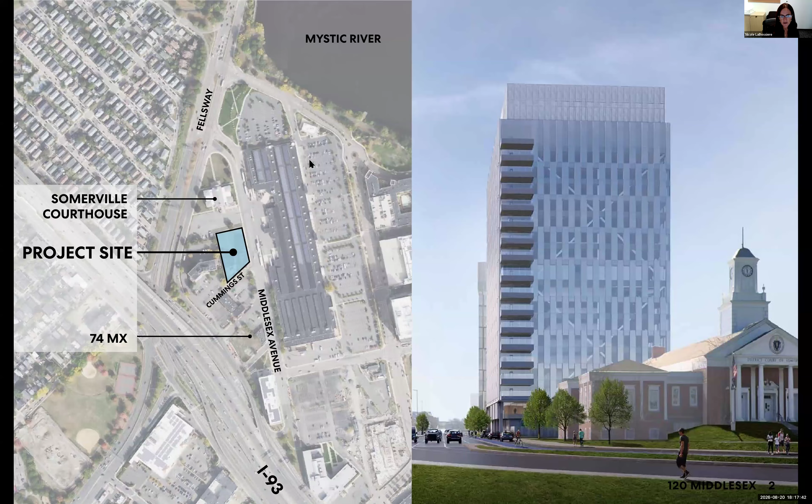While our permitting journey's been challenging and costly, the past 5 years have resulted in an even better building in sight, thanks to city staff involvement and their vision along the way. We've collaborated most closely with planning, mobility, and urban forestry to accommodate requests such as relocating parking off of Cummings Street, pulling the corner of our building back, adding a 12-foot wide multi-use path, and revising our Cummings Street streetscape for the future of a one-way road. We appreciate all the thoughtful ideas and guidance to get us here tonight.

Next page. Tonight's presentation was informed by staff comments in that process, so we're hopeful that you can keep that in mind while you listen and share our goal of a fully entitled project. While things may appear slow on the surface, having an approved project to offer will allow us to compete in what is truly a competitive environment.

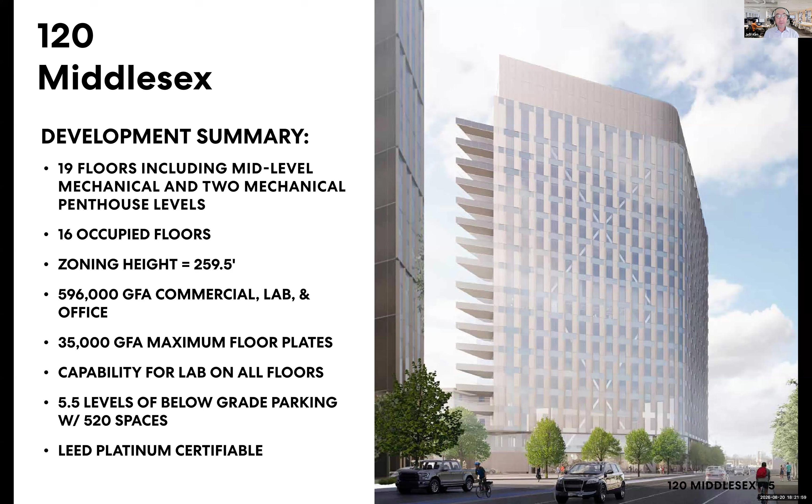This is a view of the project looking south with the courthouse in the foreground on the right. As you enter the district from the Fellsway onto Middlesex Avenue, the project will establish a new gateway to this growing new life science cluster in the larger mixed-use district.

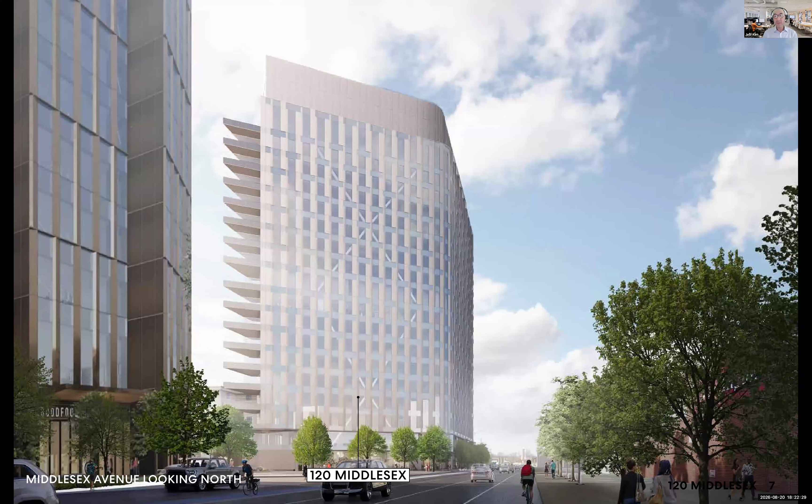Now you're looking north along Middlesex Avenue to help orient you. 74 Middlesex is on the left, which has recently been completed. Together, these two projects will significantly improve the pedestrian experience along the street. There are a few features I would like to point out in this view.

The proposed facade combines glass and metal panels in a layered pattern. That composition extends over the first mechanical penthouse level, helping to reduce the perceived bulk of the two-story mechanical penthouse that we currently have. The facade also sweeps around the corner at Cummings in one continuous gesture, responding to the oblique geometry of the intersection. And finally, the balconies at both north and south ends are a unique feature of the building and will provide a desirable outdoor amenity for the tenants.

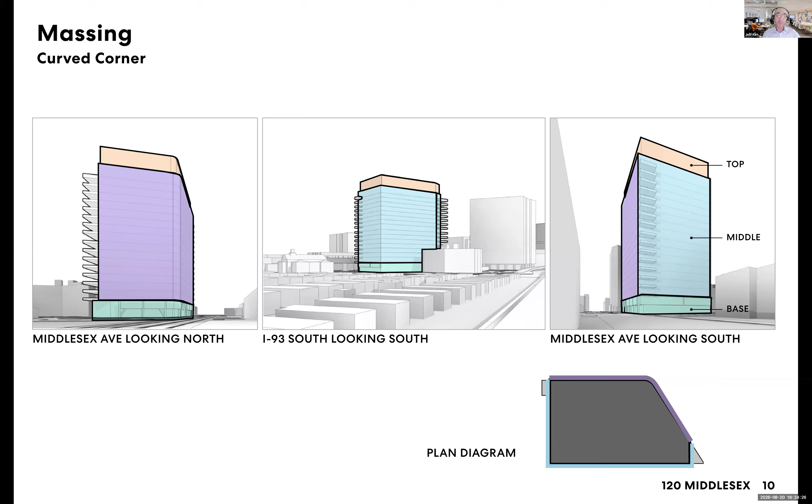This slide takes a closer look at the composition of the two facade types. Type 1 is an overlapping composition of glass and metal panels, articulated with two-story vertical fins, and Type 3 is an all glass facade using overlapping clear and spandrel glass, also articulated with two-story vertical fins.

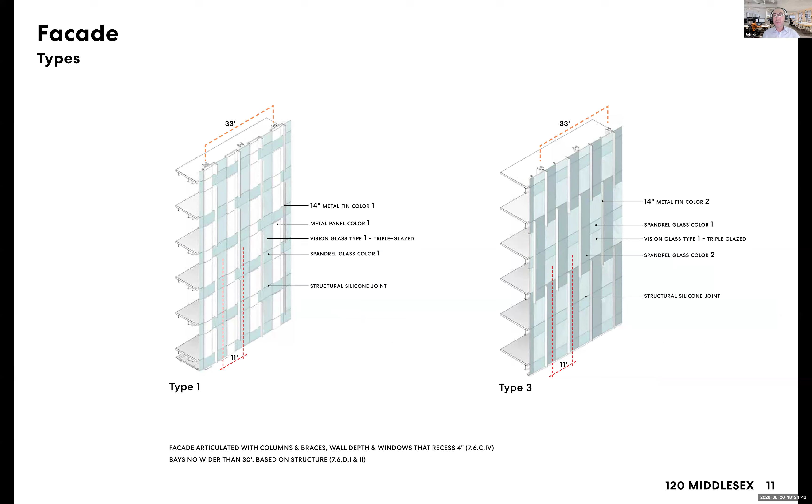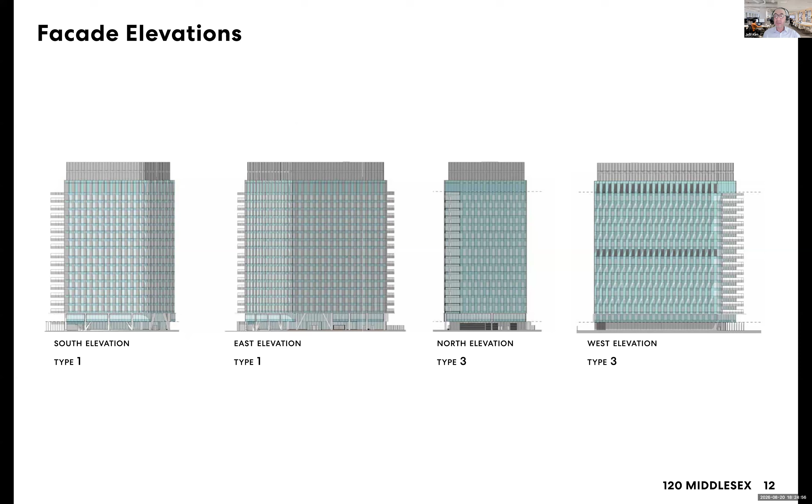And here are the building elevations showing both Type 1 and Type 3. Type 1 on the south and east facades, and Type 3 on the north and west facades.

And this time, Sean will. Thanks, Jeff. Yeah, Sean Sanger with Copley Wolf Design Group. We're excited to be here. Thank you for holding us.

Kind of just starting out with the diagram here, this is one of the early concept sketches, and I wanted to bring this back just so everybody's up to speed. As Nicole mentioned early on in the process, we had a lot of really productive conversations with city staff, and certainly one of the key pieces that came out of that was the connectivity and the pedestrian priority, as you're seeing through that hatched zone that would be along our building, which is in the upper right corner of this diagram.

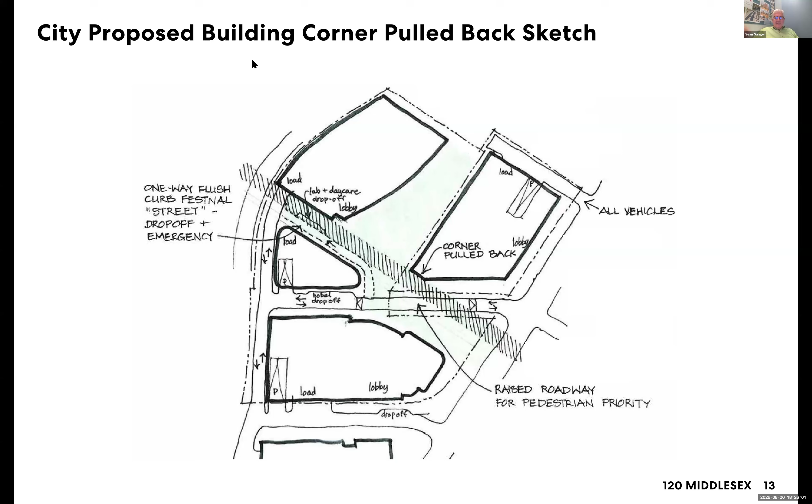And what we did as part of this conversation, once again trying to get those desire lines, visual connections for circulation, primarily for bikes and peds, is we pulled back the corner of the building. It originally projected out much further, and you definitely had a chance to see that as part of the elevations that Jeff just discussed. But once again, just looking at this at the macro level, and then what we'll do is zoom in on the next slide and talk a little bit more about our site and the context around it.

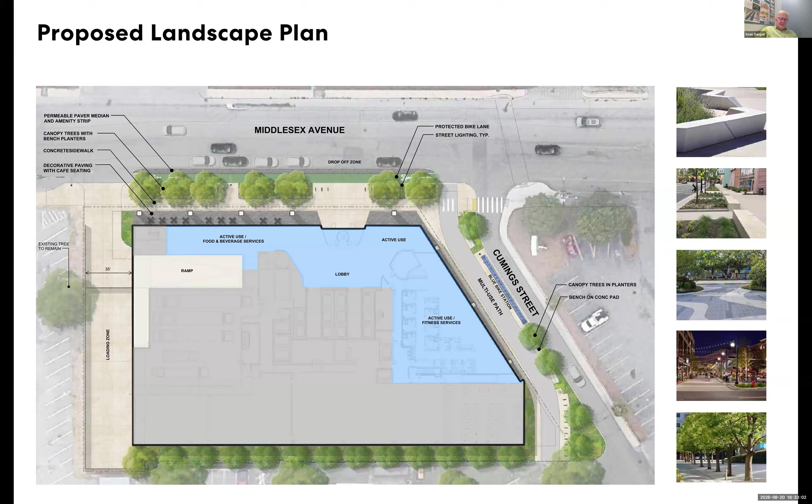We've got our planting, and we'll continue with structural soil below the sidewalks. We want these street trees to really thrive and grow, not merely survive, looking at large canopy scale both for the sidewalk and urban heat island minimization. The sidewalk runs through the center with benches and seating along the street side, and you can see the arcade underneath on the right.

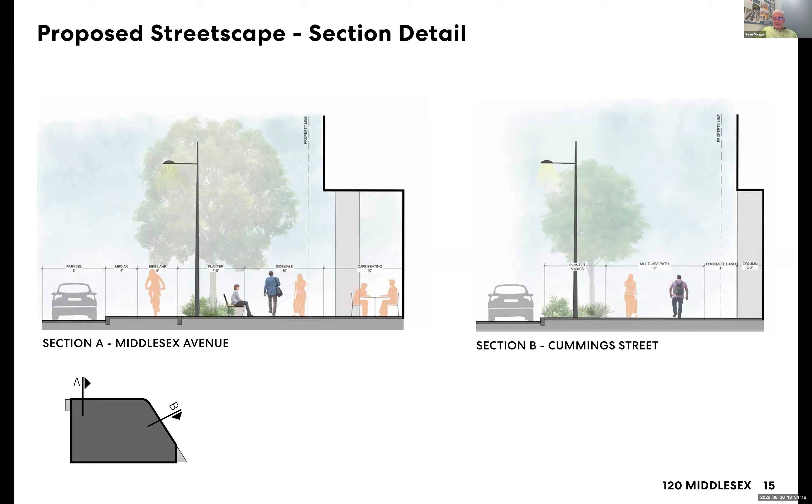This came out of a good conversation with mobility as well as public open space and urban forestry, introducing larger canopy trees along Cummings to help with heat island mitigation. We have planting below that and seating along here, plus the 12-foot multi-use path as Nicole mentioned. There's still a very comfortable buffer between that path and the edge of the building.

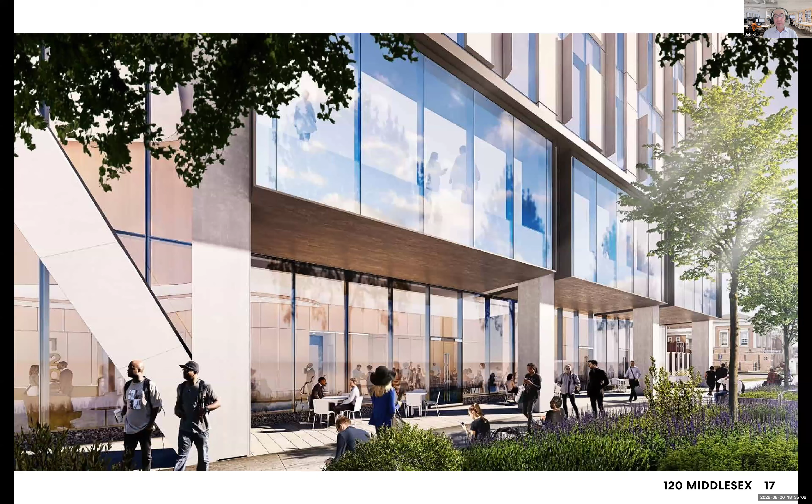Zooming into the sidewalk level, the main entry is to the left, with bench planters and canopy trees to the right. This view gives a good sense of the two-story base and the one-story arcade, framed by the building columns.

Here's a view from Cummings Street, showing the squared-off intersection of the property and the crosswalk, along with planters and bike racks. You can again see the two-story base as well as the clear view through the corner of the property toward the pedestrian path beyond.

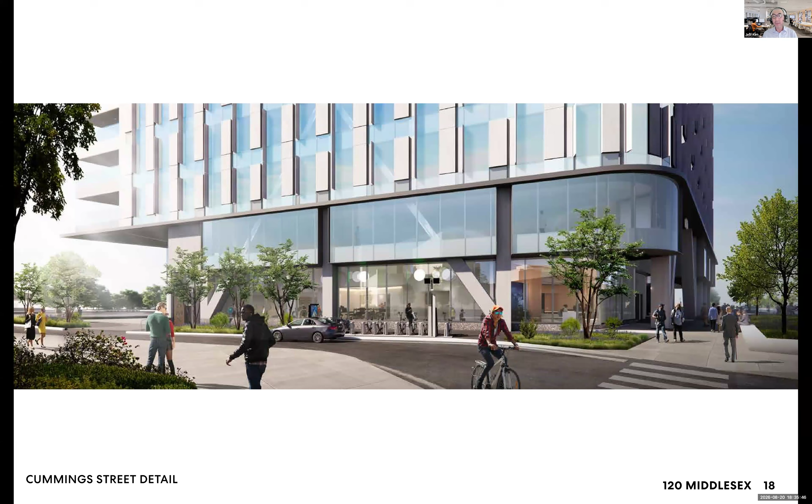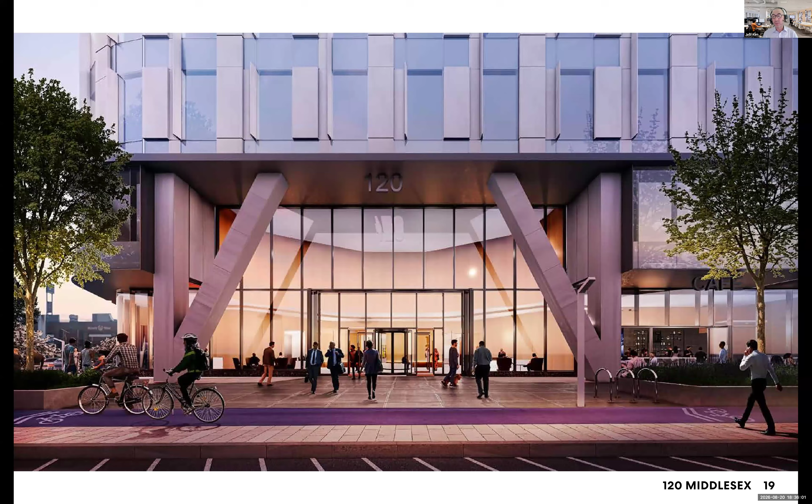This is a view of the main entry. It's a grand and transparent entry, accentuated by the structural bracing, creating a clear and strong gesture along Middlesex Avenue.

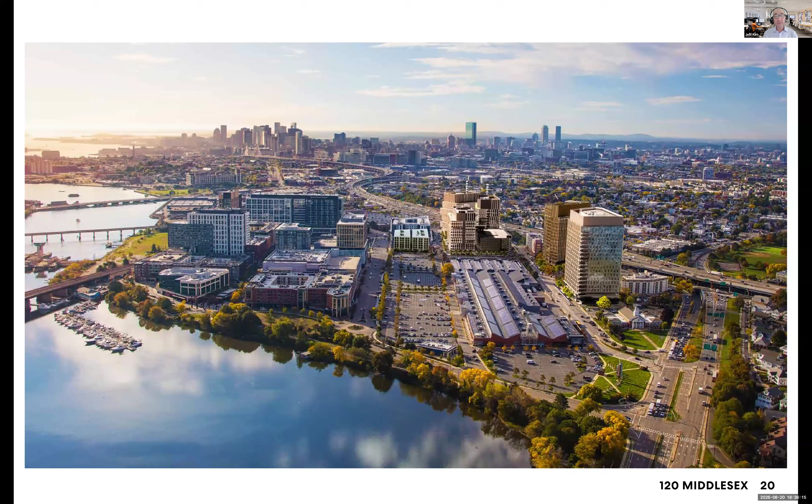And finally, here's an aerial view. It gives a sense of the future Assembly Square district and how the project fits into a larger context. Thank you.

Thank you very much for the presentation. Does anybody, outside of my question earlier, on the planning board have any questions they'd like to ask the applicant before I open this up to public testimony?

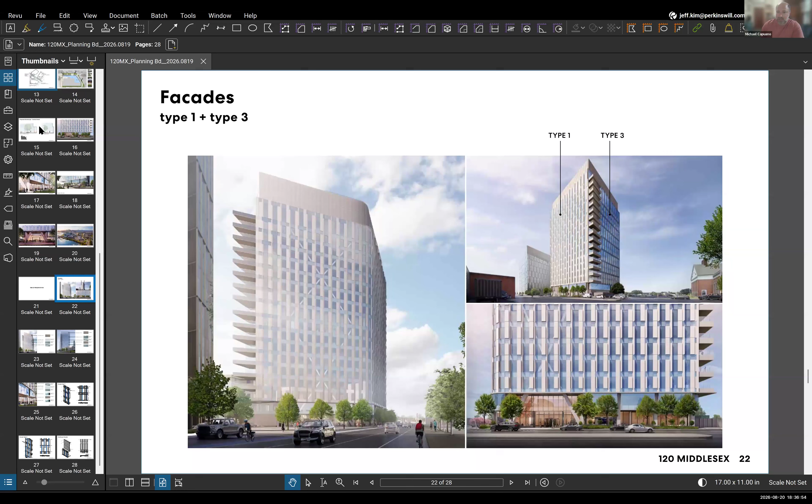Okay, so what I'd like to do now is thank the applicant for the presentation and open this up to public testimony for anybody that wants to speak in support of the application. If you'd like to do that, please hit the raised hand button and I'll call on you in the order in which I see you.

Going once, going twice. Seeing none, I will close that portion of the public hearing and open it up to anybody that wants to speak in opposition to the application or otherwise express concern. Please raise your hand. Going once, going twice. Seeing none, I will close that portion of the public hearing and bring it back to the planning board for discussion and questions for the applicant, their team, or our planning staff.

Yeah, Amelia. Thank you, Mr. Chair. I have other questions which I'm happy to field after my colleagues have raised theirs, but administratively, I'm having a hard time finding the LEED questionnaire. In the application, it's referenced a number of times in the narrative as section 9, but I don't think we have a copy of section 9 as far as I can tell. That might be a staff issue or an applicant issue, but I'd love the opportunity to review that before our next conversation with you if possible.

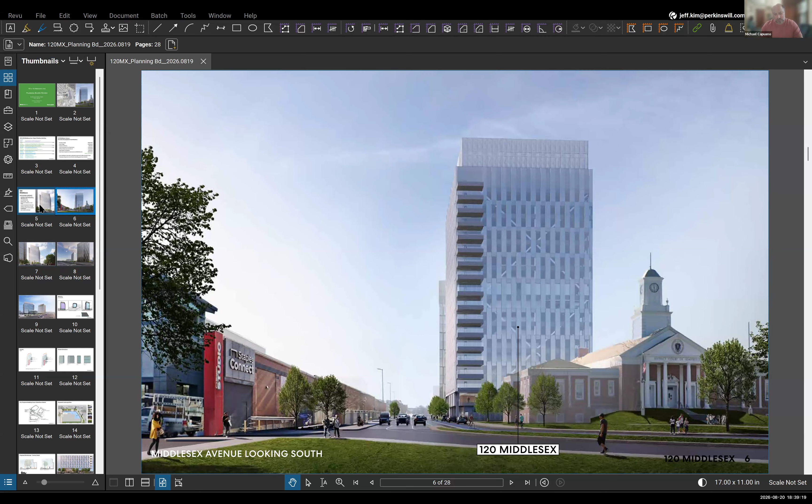Alvaro, do we have that? Let me double check. I'll see in the materials, but if not, it can be sent to the case planner and we will make sure to send it to the board prior to the next hearing. Thanks so much.

You want to keep going, Amelia, or do you want to come back for round 2? Happy to let others know. Okay, who's next? Yeah, Lynn.

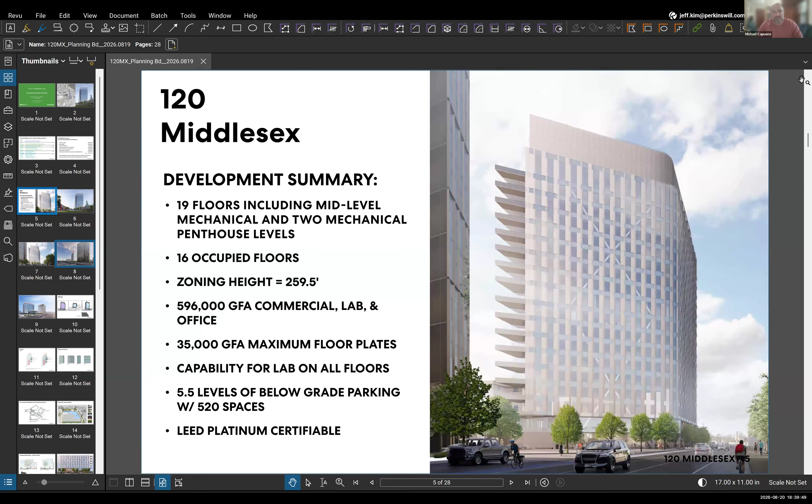Thanks, Michael. I want to circle back around to the issue that you raised around building lab space. So the Boston Globe, as you know, has written a number of articles over the last 12 months that the Boston area, not just the city but the area, has about 30 to 35% empty lab space. That's quite a lot of capacity. Now, I know in the development world, a project like this is probably going to take anywhere from 3 to 7 years to finish, right? Because you're just at the initial stage. And Wayne Gretzky, of course, says you need to shoot the puck to where it's going, not where it is now. So I understand all these dynamics, but I'm still concerned that we may have too much lab space.

And so I know you answered Michael's question like we can convert it to office, but can you talk a little bit more about what your market research is saying on this, number one, and number two, how quickly could you pivot? Because the last thing I want to see happen is that we've got this building sitting vacant, and then the city needs to make a deal and provide all sorts of tax incentives, et cetera, to get a tenant in there, which is just what happened with a building right next to it. So I'd like to understand a little bit more around your market research on this, on a 19-story lab building in an area that's got 30% capacity.

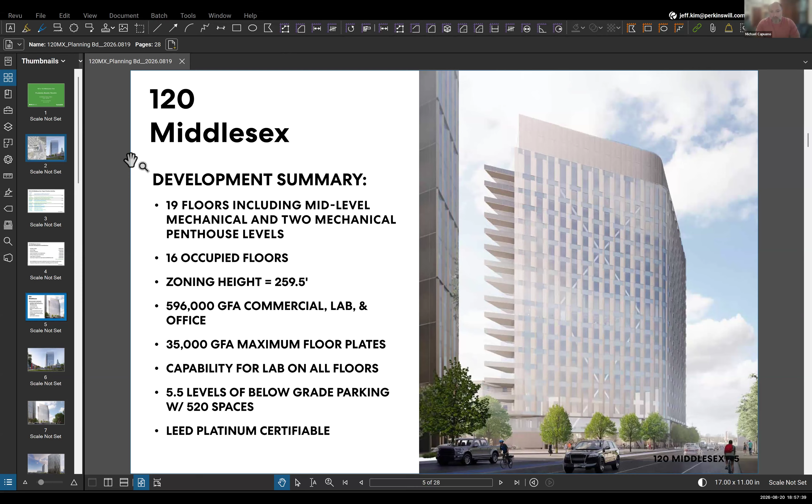So I think where we're at is I think generally we're supportive of this project. I think we just need to ruminate a little bit on whether this is the best way to move forward on this site. I appreciate some of the responses you were giving about the opportunity to move into non-lab if that's where you're going to be, because I hate to be tied down onto something that's not going to be tenanted. It sounds to me, and I need to review this meeting before next, that's not outside the scope of feasibility and reality if that's where we're at.

So what I want to do is have the board think on this for a couple of weeks and leave the written comment open, and hopefully have you guys join us in September and see where we're at as a board. Unless I'm missing somebody's questions or comments right now.

Oh, I see Amelia. Mr. Chair, I just wanted to acknowledge Lynn had mentioned earlier she might have some additional questions. I don't know if she's ready to voice them this evening or not. No, I'm still pondering. Okay, well you'll have another couple weeks for the pondering.

Mr. Chair, can I ask just one question for future? And all those questions are thoughtful.

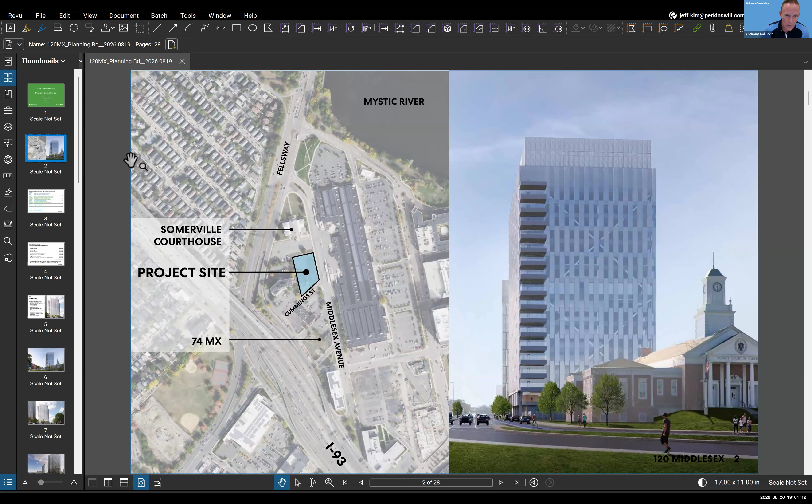And if those companies decide to walk away, you end up with disparate ownership back to sort of one-time developer folks who I don't think will invest the kind of money that folks like Divco have invested. The good news is the big names are still hanging in there at Assembly, and we think Divco's one of them. So I wanted to say that because we were hoping to have staff give a resounding representation of how thorough and responsive Divco was over the last really 4 or 5 years, and that didn't happen. But I know you've read them, I know you all know that, but it's important.

I appreciate that. Where I'm hoping to go in the next couple of weeks is I look at this positively. It's been, as you've reiterated, a very long process. I think another 2 weeks, particularly so Amelia can have some of her questions about the LEED document reviewed, that hasn't reached where it needs to reach, I think is going to put us in a much better place to hopefully move forward in a positive way with this application.

As one member, I'm pretty pleased with the responses you've given. I think we need some rumination over the next couple of weeks, but I would like to be hopefully optimistic based on all the work you and the team have done to get us to this place, and kind of been responsive to the inquiries of the board and of staff. But that's kind of where I think the board is at this point. I very much look forward to seeing you all in a couple of weeks and seeing where we go. Thank you very much.

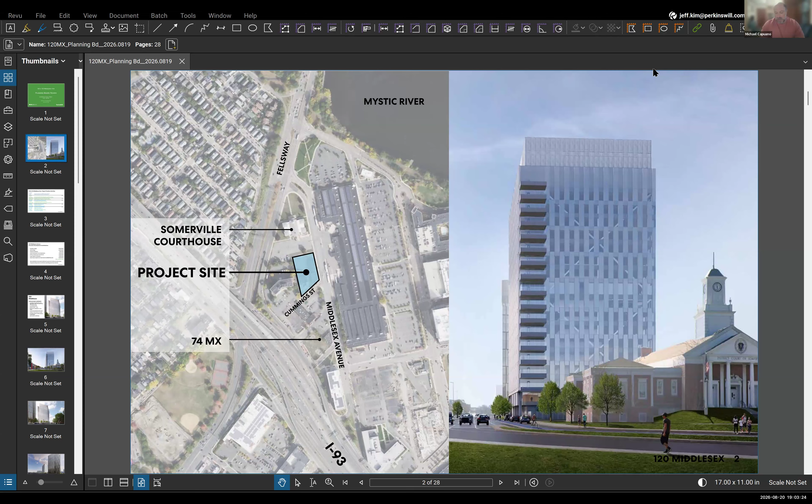Thank you. We look forward to it too. So with that in mind, I'm going to leave the written comment open to planning board at somervillema.gov until 9 a.m. on Friday the 28th, and continue this agenda item to September 3rd.

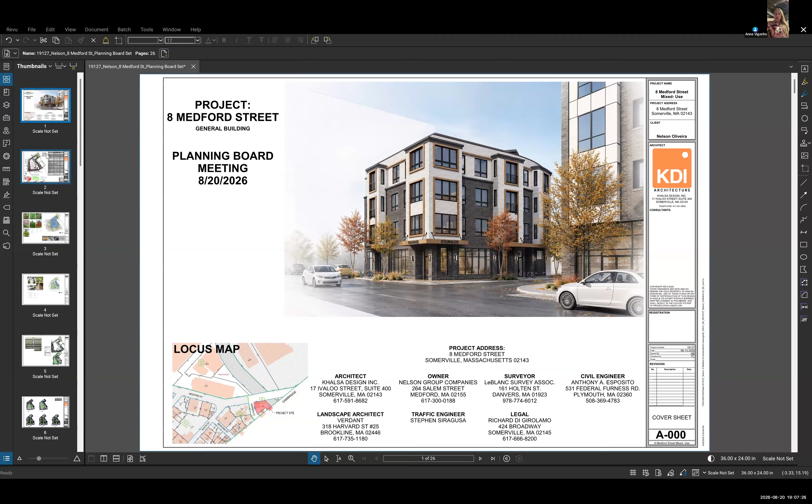All right, so I will begin. We're here this evening to discuss 8 Medford Street. Medford Properties LLC is the applicant. It's in an MR4 zoning district. We're proposing a 4-story general building. It'll be mixed use, 18 residential units.

Those will be a mixture of 1 and 2 bedrooms. The first level will have commercial space. It's on a pedestrian street, so any potential tenants will have to comply with the requirements of a pedestrian street. At this time, the developer doesn't have any clear indication who a tenant would be for that site. One of the more important things here is there's no parking on this site. As I stated, there'll be 18 residential units, and 3.6 of those will be for affordable use as well.

Mobility is supportive of our request to not have parking on the site, and they're supportive of our proposal to have a loading zone in the front of the building, because if I lived at that building, Amazon would be there every single day. So in the world of delivery trucks and moving trucks, people moving in and out, the loading zone will be extremely helpful and ease the neighborhood's concerns.

We did have several neighborhood meetings. Our first one was back in October of 2021. All of our neighborhood meetings were hosted by Ward 2 City Councilor JT Scott. At the first meeting, traffic was a question. Our second meeting, on June 27th of 2022, we actually discussed the traffic study. That's why Steve Siragusa is here tonight, because there could be some questions on that.

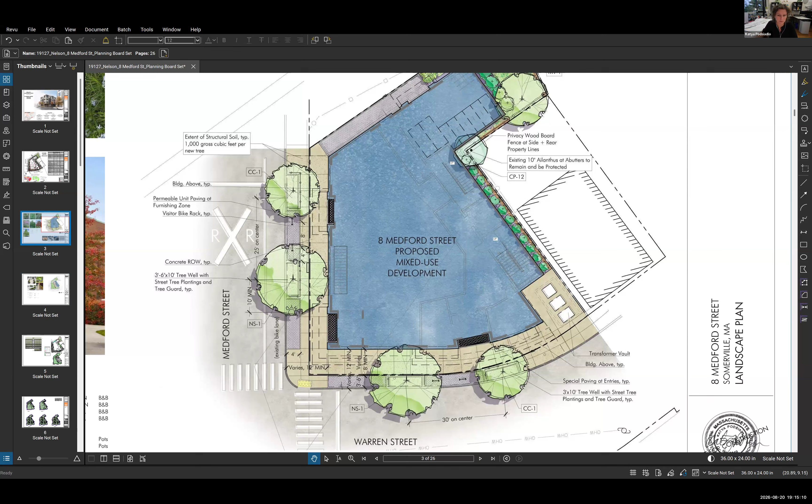This design incorporates all of the city's streetscape design elements and dimensions that are required, including structural soil around all the trees underneath the pavements, tree guard fencing like the little knee rails around the trees, open area wells with the correct open square footage. A new concrete paved pedestrian sidewalk will be built, wider and safer, set back from the curb line behind those trees, a minimum of 10 feet wide for both streetscapes.

Currently, there are 2 curb cuts that come into this site, one from Warren and one from Medford. With the reconstruction of the sidewalks, these curb cuts will be closed and eliminated, making it much safer for pedestrians.

Along the rear and the side, in the green spaces, we've incorporated native, shade-tolerant, and climate-resilient plantings to help enhance biodiversity. And at the very rear, in the slightly enlarged green space, there's a rain garden, so we're proposing wet-tolerant style plantings, which will also help mitigate stormwater.

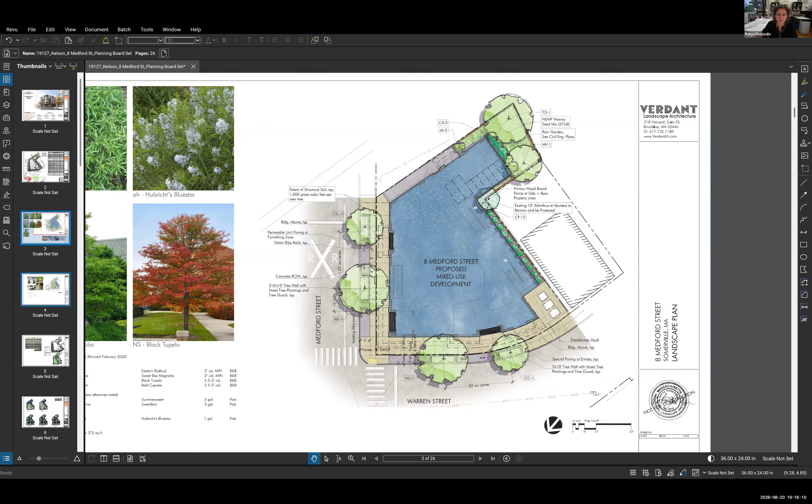The imagery, if you zoom back out - you can see some of the materials and style we're proposing: fencing, bike racks, unit paving, and some of the plant species which are native. If you could go to the next slide, please.

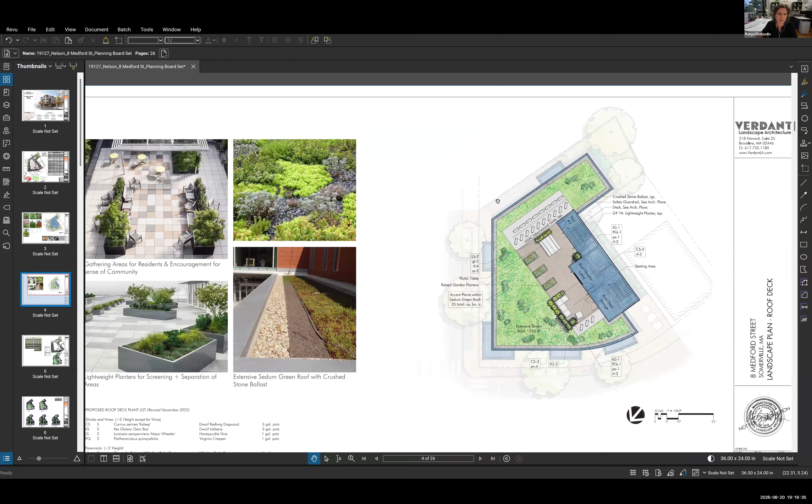So here we're hopping up to the roof level. The blue rectangle is the elevator head house and stairs head house. We've located the patio deck area on the north side of that head house, which affords a little bit of shade from the structure to its south, so a little bit of shade will be cast onto the deck area.

Surrounding the deck is a minimum 6-inch depth extensive vegetated green roof. We've also included some lightweight planters to help divide up the deck into several zones so that several people can come out at the same time and sit separately if they want.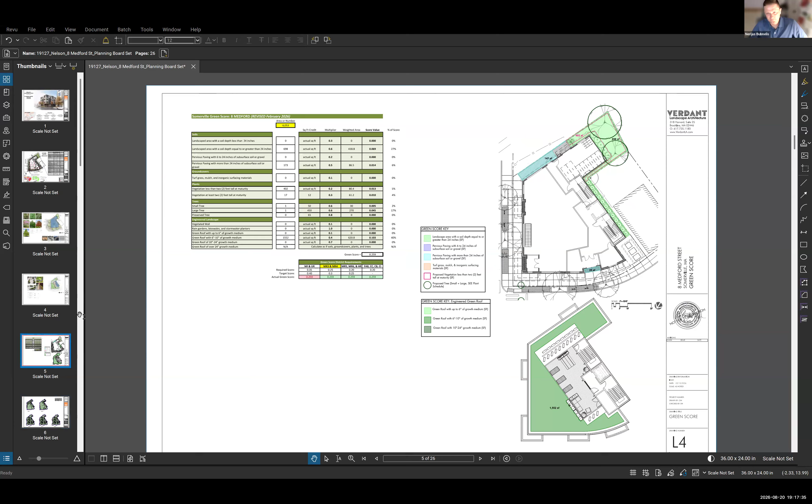Yeah, thank you. So continuing forward, just quickly running through the area plans. The gross area of the building shown here, which includes the basement, is approximately 20,500 square feet.

Moving to the unit areas as well as commercial areas and square footages. As previously mentioned, we have 3 types of units: studios, 1-beds, and 2-beds. We have 6 studios, 9 1-bedroom, and 3 2-bedroom units. The 2-bedroom is approximately 750 square feet, the 1-bedroom is between 590 and 650 square feet, and studios are 370 to 380 square feet.

We have 3 affordable units that are marked in red on those plans. On the top left corner, shown in gray, there's a residential program with mechanical for the building, storage for units, and circulation areas including elevator and stairs, and then we have commercial area and storage area. On the first floor, we have commercial space on the corner of the two streets, and then the rest, on the right side of Warren Street towards the back alongside the setback line, we have circulation on the floors above.

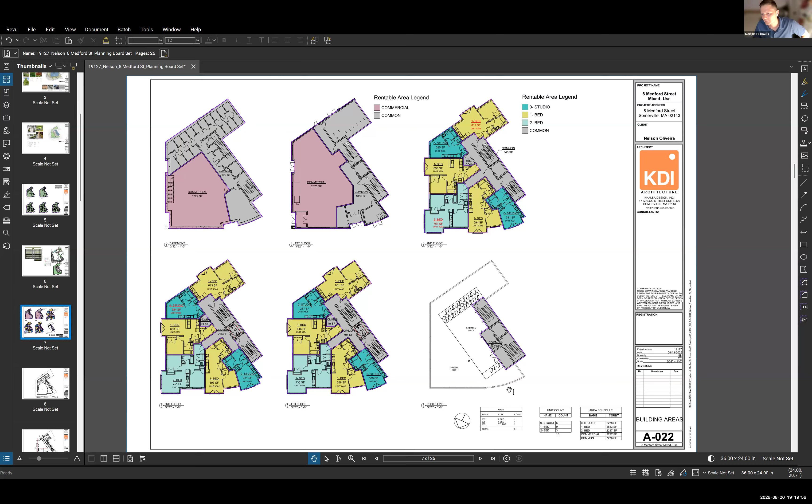The floors second to fourth are stacked, so the unit layout is pretty much the same, with color indicating different types of units. The roof deck itself, as a tenant amenity space, is around 700 to 750 square feet, and then there's some mechanical equipment on the roof level. I think I've covered most of the area plans, but if needed we can zoom in on the floor plans during the discussion section.

I'm going to jump right into the renderings and materiality - we were able to infuse a bit of life into the renderings from those we submitted late last week. In terms of materiality, we proposed full masonry brick in a mix of grays, and then lap siding, with some accent cornices and accent details in a fiber cement bronze color.

In terms of massing, we propose the first 3 stories to have heavier material and full masonry, with the upper floor in lighter material and lap siding, then slicing the rest of the facades with an overhanging base of the lighter material with bronze accents. We've grounded the base with masonry pilasters, if you will, just for architectural look.

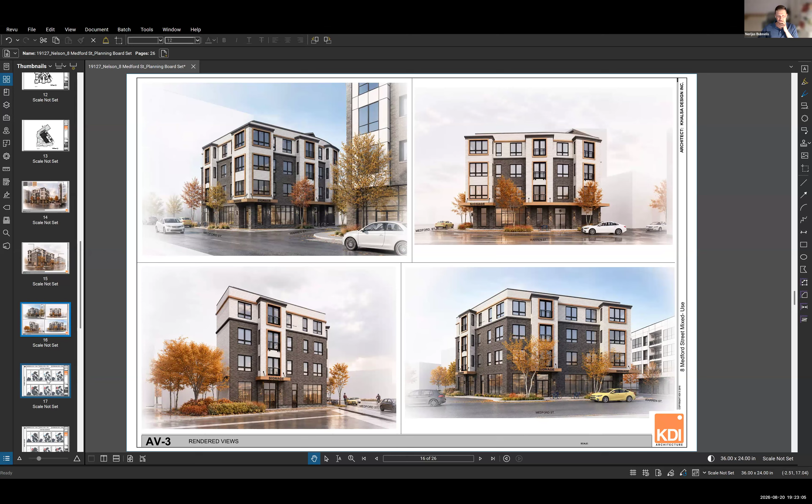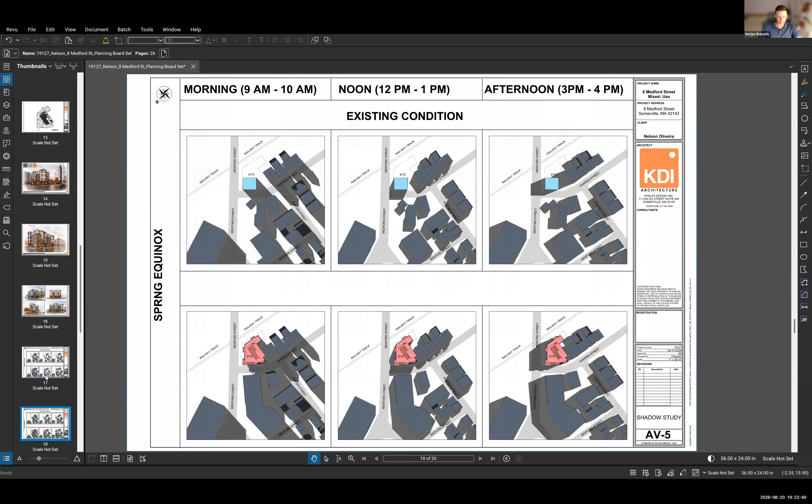On top we show the existing condition, and on the bottom the proposed condition, for each summer solstice and basically each time of day. We see most of the shadows in the summer falling towards Warren Street, and then in spring obviously getting longer and longer shadows, until in winter most of the shadows fall almost on the Medford Street side.

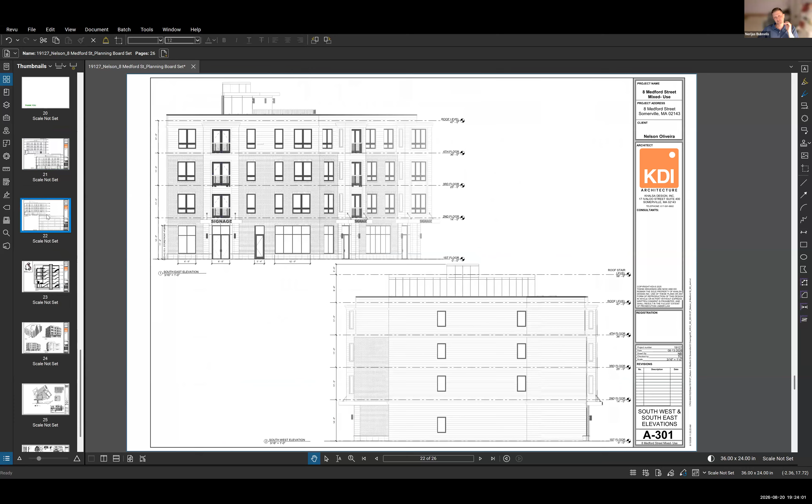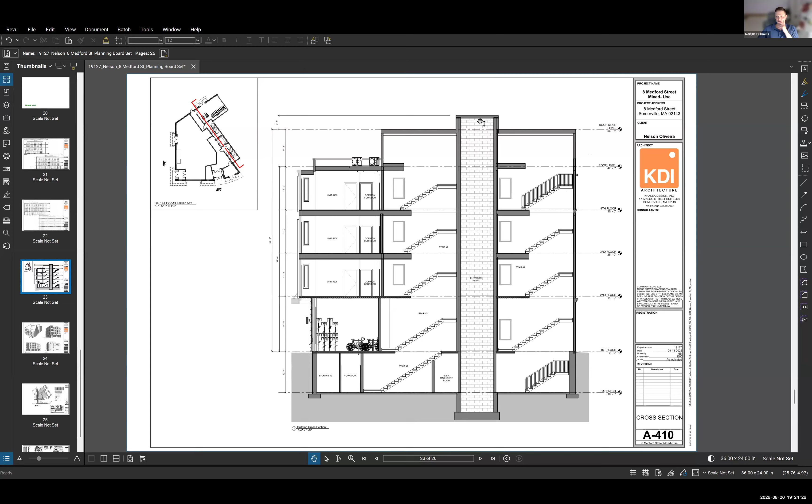And then I have elevations that I believe, if needed, we can touch base on during the comment period. Building section, cut through the stairs just to show the height of the building. The height according to zoning was 47 feet, and then height with the stair head houses as well as elevator head house. That probably concludes my presentation for the architectural portion.

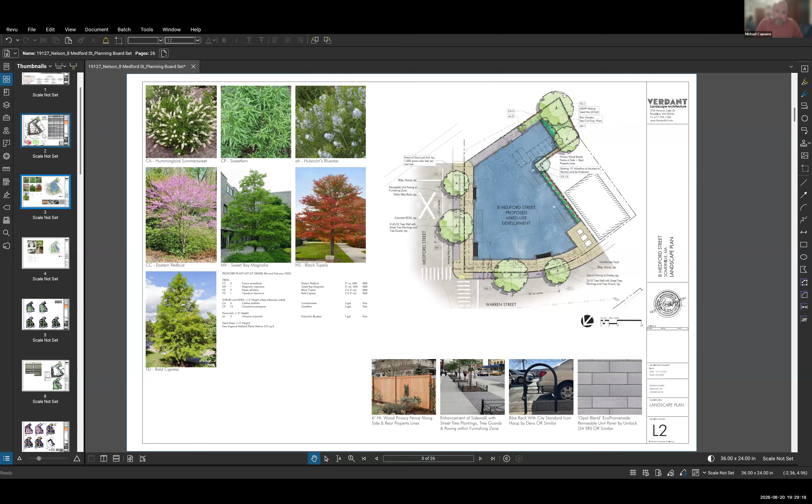Chairman Capuano, Steve Saragusa, our traffic engineer, did a very thorough study of this, and we looked into what the gentleman said and want to answer your question. I don't believe we're in a transit walk shed.

But are we still able to condition the fact that people wouldn't be able to get residential stickers? I think you might be, but I see Kit, who's got her hand raised, so hopefully she might be able to weigh in.

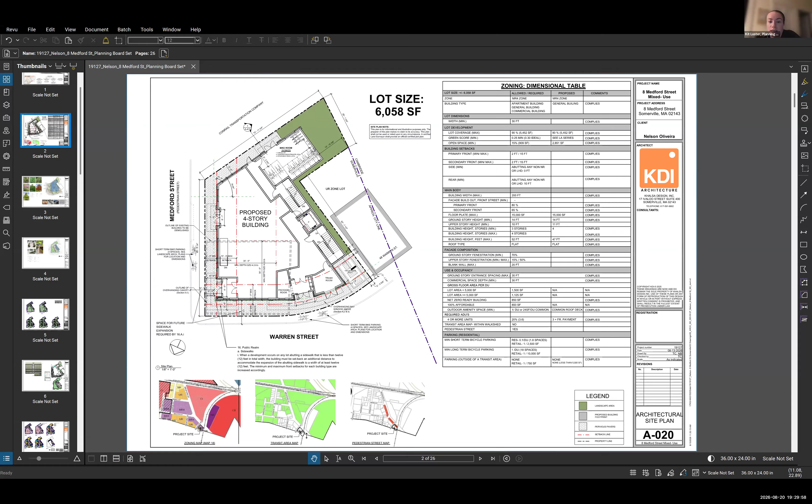Hi, this is Kit. The last time I spoke to Mobility about these very conditions, the residents of this building would be eligible for residential parking permits as they're outside the transit area, and the traffic commission regulation would not be applicable to this development. They are not in the transit walk shed.

How many, so I guess talking about that, while we're on Warren Street which splits the city line, how much availability is there for on-street parking for people who would be eligible for stickers on this residential street versus not?

Maybe Mr. Sturgis has that data. Steve, are you able to give that information? Good evening, my name is Steven Saragusa, the traffic engineer.

I authored the transportation access plan submitted for this site. This Cambridge line is just around the bend, maybe even around the bend of Warren Street, right on the backside, that city line. Currently, with signage, there's maybe space for 3 parking spaces there, about 40 to 60 feet worth of space. Along the surrounding streets, there's a lot going on with Medford Street construction, but along Warren Street, there's really not much opportunity for on-street parking.

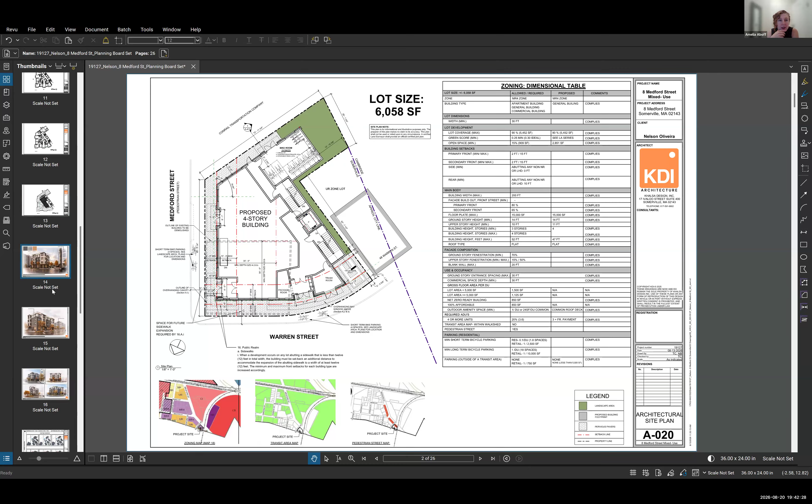I'm sorry, Mr. Chair, I just wanted to follow up on the design point before we close out. It looked like there might have been one facade of the building that did not match the others going around, like perhaps it was all lap siding without the masonry detail. I didn't get a good look at it, and I don't think I have this plan set uploaded yet, so I'm not sure if you can bring that back up, but I'd love to ask if we could revisit that either today or on the 17th. Often the planning board has an interest in ensuring buildings feel complete around all three dimensions if there's not something immediately abutting there.

I'm having trouble with the exact context mapping of this rendering, because it's the first time I'm seeing it live in the meeting, relative to the neighborhood. But to the extent those facades are going to be visible, I'd love to discuss whether having them a little more aligned with the primary facade design is something anyone else on the board would hope to see. Thank you, Mr. Chair.

I'm looking at the renderings. No. Okay. So I think we have some questions that we'd like some responses to, and maybe some follow up at the next meeting. So I would move—I see Lynn's hand before we continue.

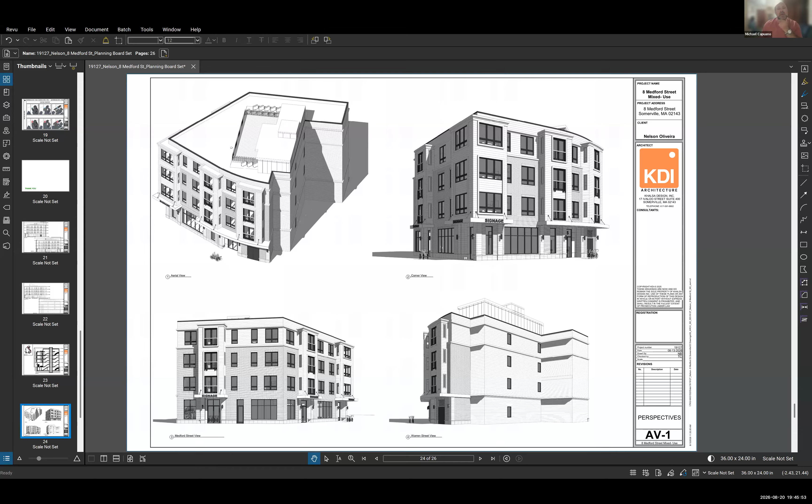You asked what other planning members thought, and that's kind of why I asked—if nothing's going to be presented, where are people going to go? What other opportunities will people have, whether it's a centralized area or not? So I'm happy to engage in this discussion. I'm not stuck on that particular condition if it just doesn't make sense on this project, especially because it's outside the transit zone. But I'm generally supportive of it, and I just want to make sure we're doing everything we can to answer the questions we have.

This issue has come up quite a bit, and I know we asked staff to set aside time for us to have a broader conversation around housing unit mix. I'm wondering if it would behoove us to set up some time to talk more broadly around parking options within the city of Somerville.

I love that, I think we should. Because I fear—and you know, I'm a bicycle advocate—that if we don't get ahead of this by providing, city-led, options like parking garages and district parking, there's a lot of different options out there, there's going to be some significant pushback at some point in the city. So I'd love to have that conversation and include Dan in it, as well as some people from mobility, and talk about this generally, so it's not project by project, but that we're setting up some bigger picture goals for ourselves.

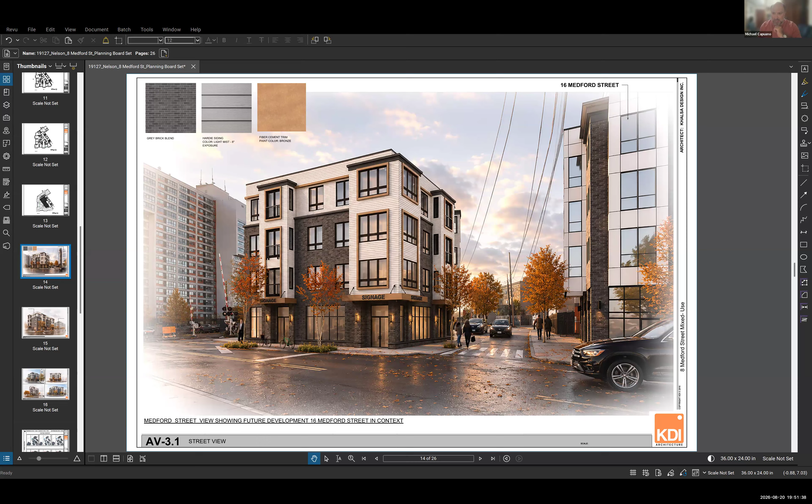It is 7:51. Here's what I'm going to do. We have one more agenda item, a matter of other business on a potential amendment to our ordinance related to jurisdiction of the planning board. I would like to do the following: let me see who's still in attendance, both in the audience and among the panelists.

Attorney Vigorito is still here. I would like to invite her, as well as anybody else in the audience, to stick around for our discussion on this potential amendment to our ordinance, because I would like to hear what some of the public thinks of it. The reason I'm asking Attorney Vigorito specifically is because she's got a long history of practicing before both the ZBA and the planning board, so it would inform me and the way I look at it by hearing about her experience maneuvering both processes.

But before we do that, I want to take a very brief recess. Let's do a 3-minute recess and reconvene at 7:55. Thank you all very much. I will ask Attorney Vigorito to weigh in, as well as any other members of the public who are here.